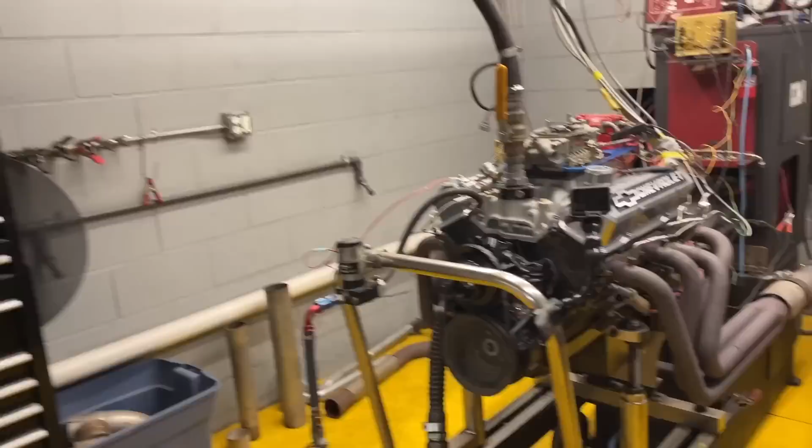So here it is, all set up, ready to go. There's some loud noises in here, sorry about that. But we're looking good. Got everything hooked up, just about ready to fire up. Gonna put some heat in it before we make some pulls. And we should get some valuable data from this thing.

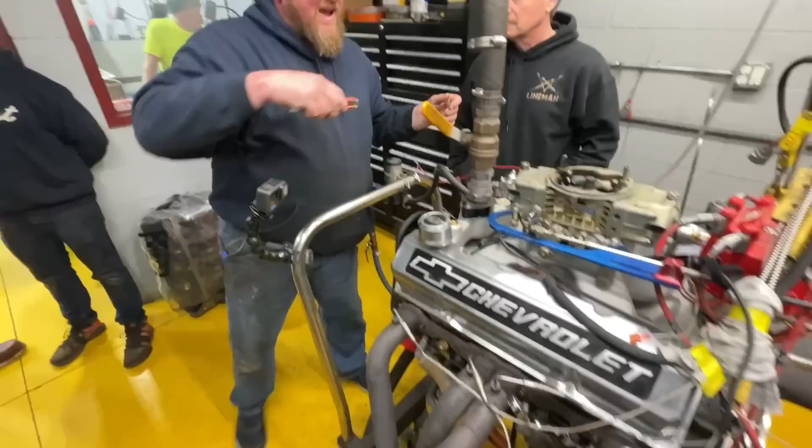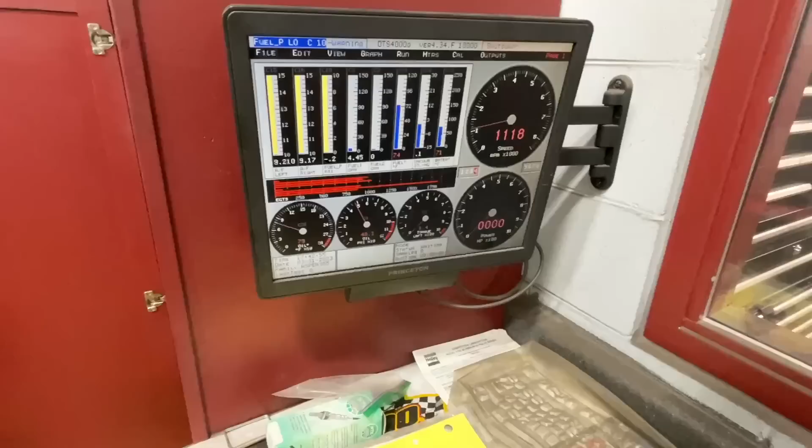Went through, just put some new plugs in, found one of them was broken, saw it arcing. That was a really bad deal. That's what happens when you reuse spark plugs. Never do that. Throw them in the junk where they belong. And yeah, now we're gonna try and make some numbers, see what it does.

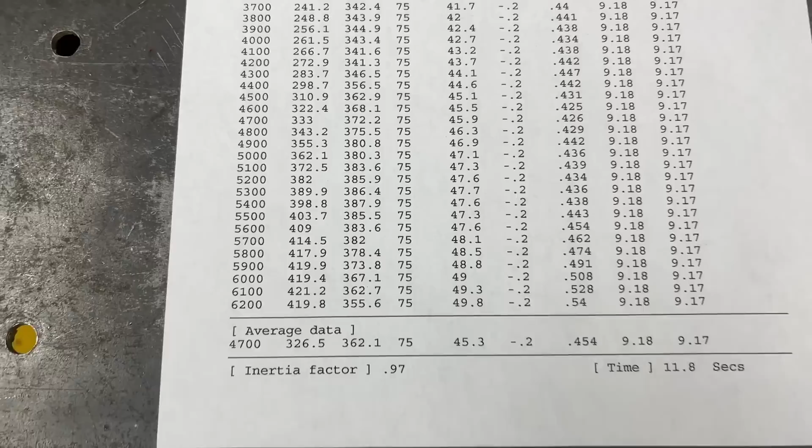So I got the dyno sheet in hand. First hit, pretty decent. Let's take a look at this, see what it says. I'm not mad about it for the first hit, let's say that. So here we go, 6,200 RPM, 419 horsepower, and our peak torque looks like it's about 387. So, not bad. It's not 500, but it's also the first hit. So, yeah, 419. Pretty decent. Let's maybe give it a few minutes and run it back, see what it does.

Lost the belt. Yikes. All right, we'll have to investigate that. Turns out really bad pulley setup on this thing. The lower is pretty bent, so that explains why I just chucked that belt. So gonna have to go get a new belt. Gonna have to get a new lower pulley for this thing. That's not junk. Hopefully we can piece something together and make it work.

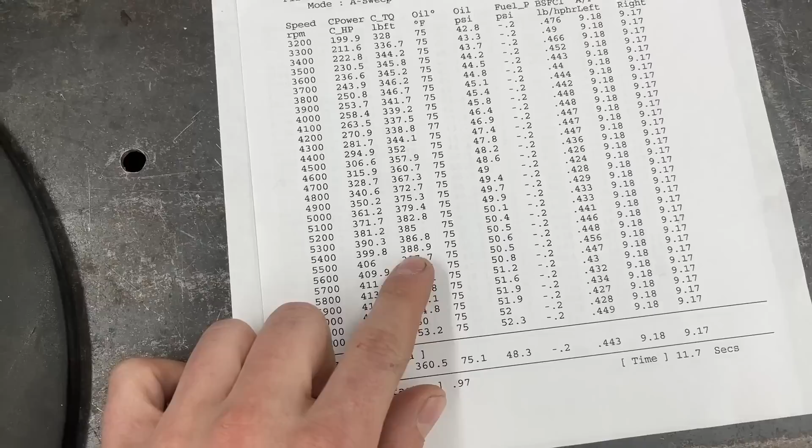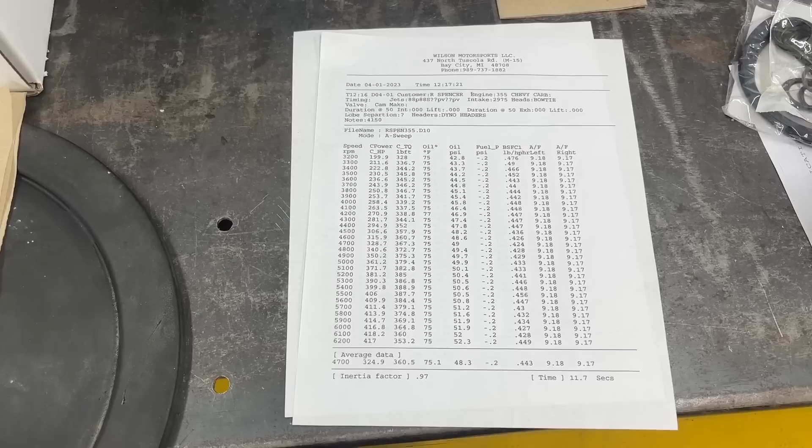But let's just see what it made for power. Maybe top end, without having the drag of that water pump for a second or so, maybe it made some more power. Who knows? Let's see. So not quite the 419 from before, but 417. Margin of error, that's pretty good within a couple horsepower. Peak torque, 388 at 5,400. I think I misspoke on the first one. 387 was the peak on that first pull. So we'll head to the auto parts store, get a new belt, and see what we can source for parts around here to get it to where this doesn't keep throwing the belt.

All right, it's a new day. Turns out auto parts store was closed. But we got our belt today. Pulley setup is a lot better now. We have actual non-bent pulleys, so very happy about that. Nothing else to do but run it. See what she does.

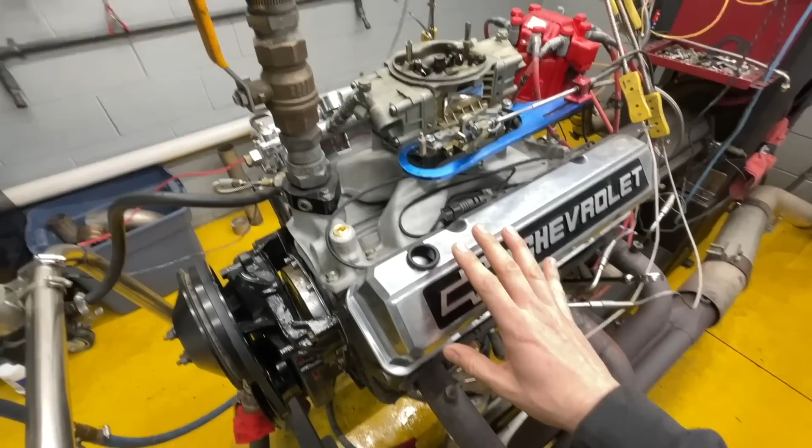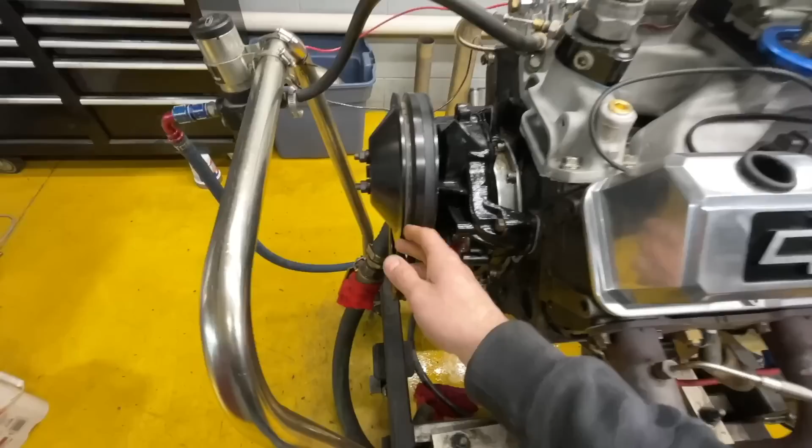All right, one other thing. We're running this without the breathers on the valve covers. If you saw in the video, you could see the dipstick lift out. So I think there's just a little bit too much restriction in these breathers. So we're going to try and get rid of some crankcase pressure, and we'll see how she does. Pulley setup is much better. I'm very confident in that, so that's a good deal. Let's run it.

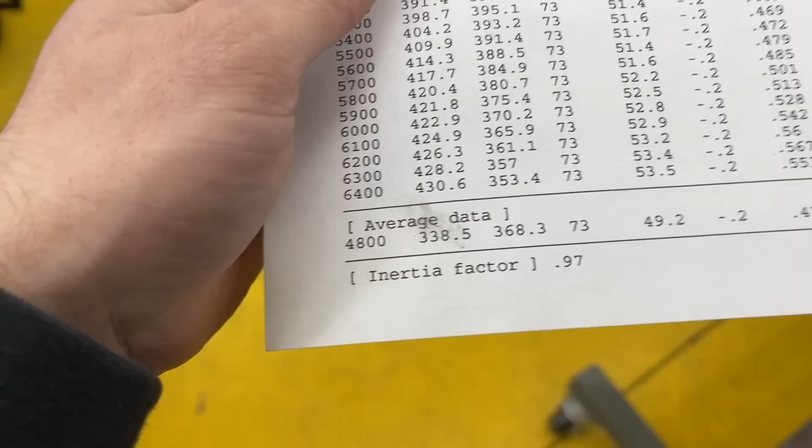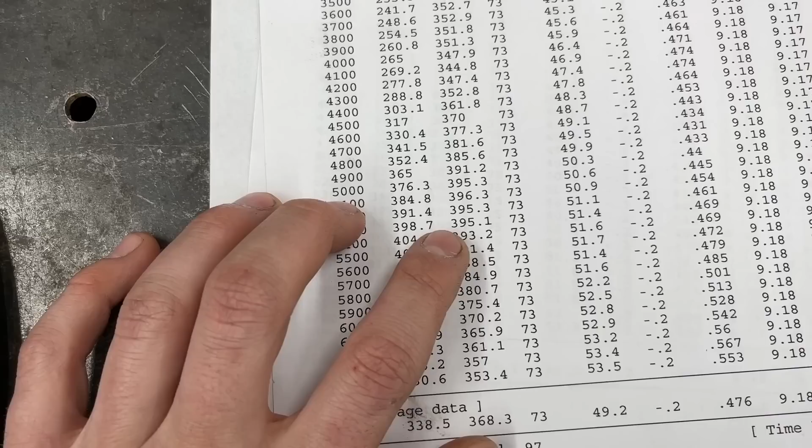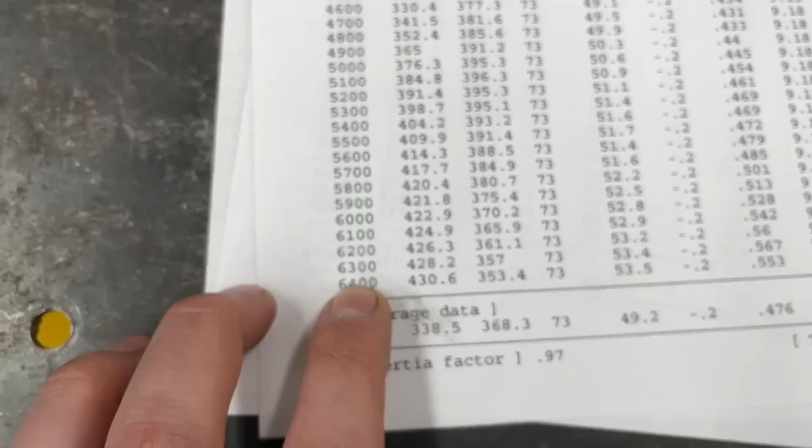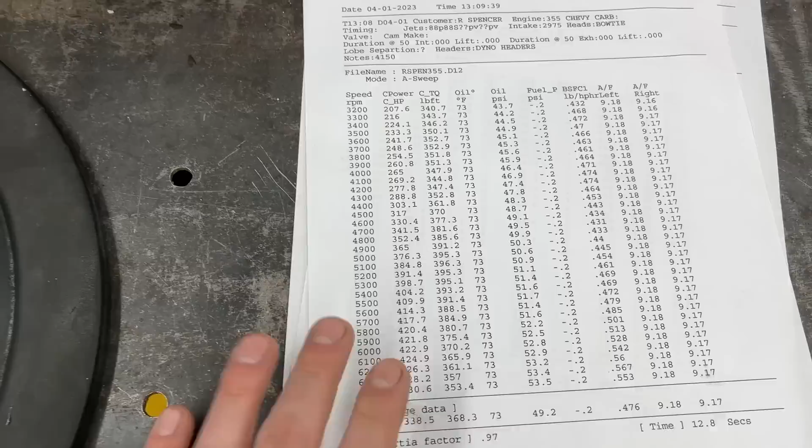Oh, yep. So if you see that number, it's a good thing, but I also have some bad news. So 6,400 RPM, made 430 horse. Peak torque was 396 foot-pounds. So decent increase there. But we're having a little bit of an issue in this department. If you'll notice, 6,400 is not 7,500. So we tried to really lean out this time and take it up a lot higher. And there's unfortunately some sort of issue going on that's causing it to break up at anything above 6,400.

And unfortunately, there's a pretty big line of other stuff that we need to be working on, so don't really have time to diagnose the problem. We looked at some small things right after that pull, and we're not seeing anything super obvious. So it's probably going to be a matter of having to run this engine at some other point, maybe in a vehicle, maybe on the dyno again, but probably not. So 430 horse, that's what we ended up with today.

I don't know if I can call this the 7,500 RPM small block anymore because, well, it didn't turn 7,500 RPM today, but it's that in spirit. It is what it is. We'll get it figured out. And judging by the sheet, it still kept climbing in power, so it wasn't falling off. I think there is more power to be made. But we'll have to investigate that at another time.